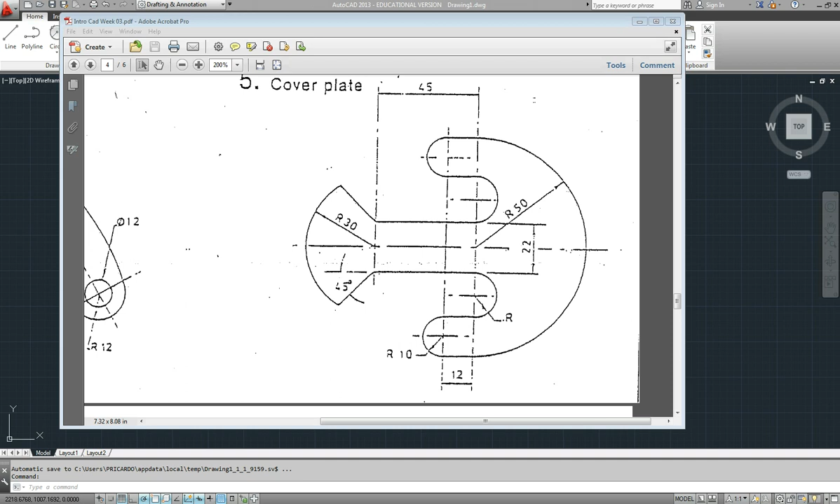This exercise on the cover plate. Let's just draw this. So the way we'll go about it is we'll draw in a centre line to join the two centres of these arcs, and then we'll start working on the circles from there. So first of all, our centre line, and that is 45 long, gives us the size of our drawing.

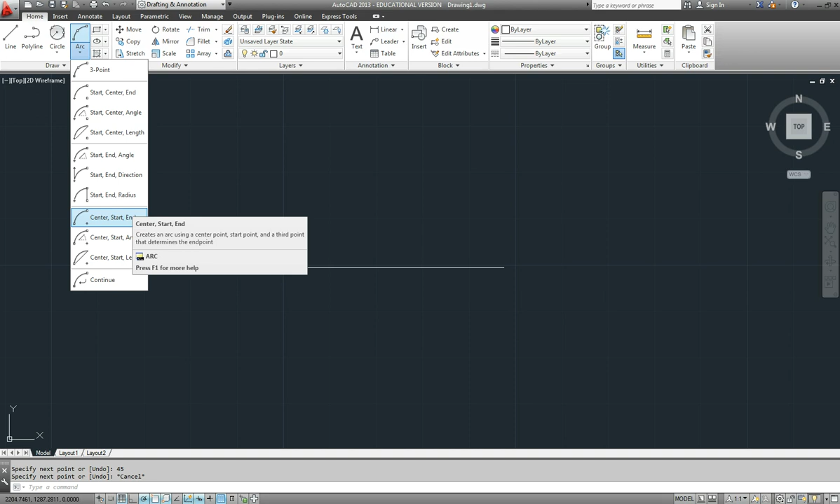Now we can draw the major arc in straight away. It's a radius 50, so let's use arc, and we know the centre point, we know the start point is directly above or below, and we know the angle is 180 degrees. So here's our start point.

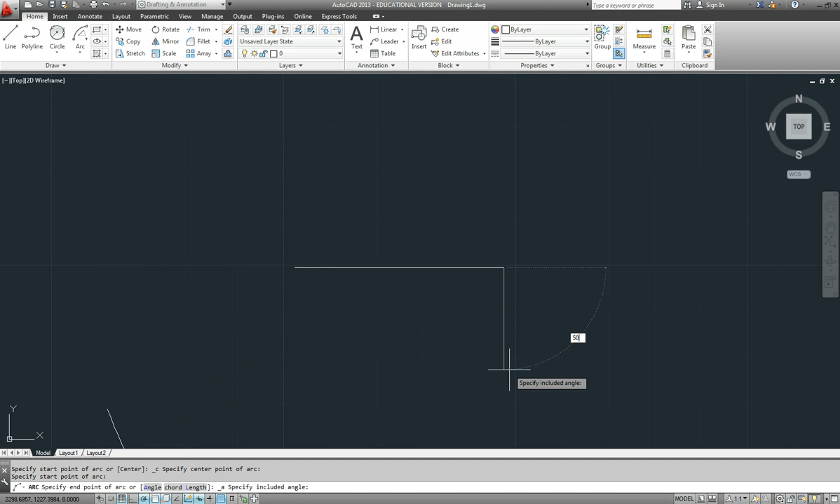Now for some reason it's not giving me a tracer line with the polar tracking. It should be at 30 degrees. Something funny going on there. Now it's doing it for some reason. Okay, so we want to go 50 down. It's our start point. Let's undo that. We'll do this again.

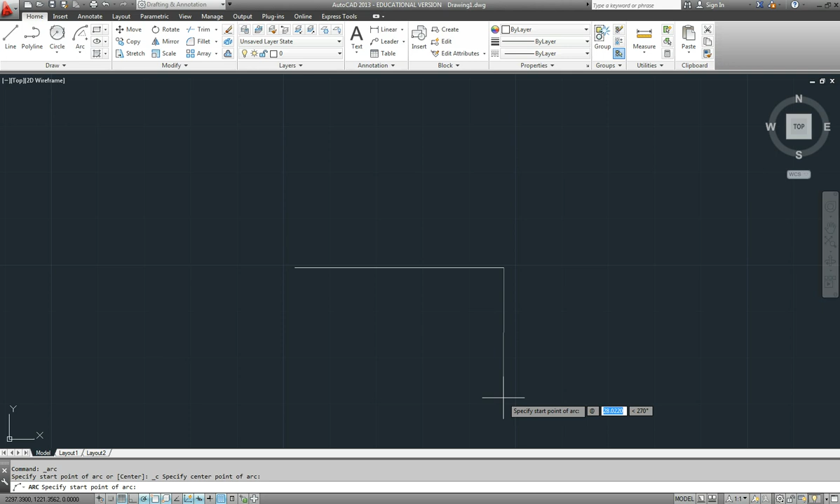So back to arc, and I'm going centre, start, angle. So there's my centre point. For some reason it's not giving me a start point straight down from there, so I'll use the relative command. So we'll go relative to that point. Let's say in the x direction will be 0, and in the y direction will be minus 50. Right, there's more than one way to do it. And the angle through which we're going, zoom down a bit, is 180 degrees. So there's our major arc.

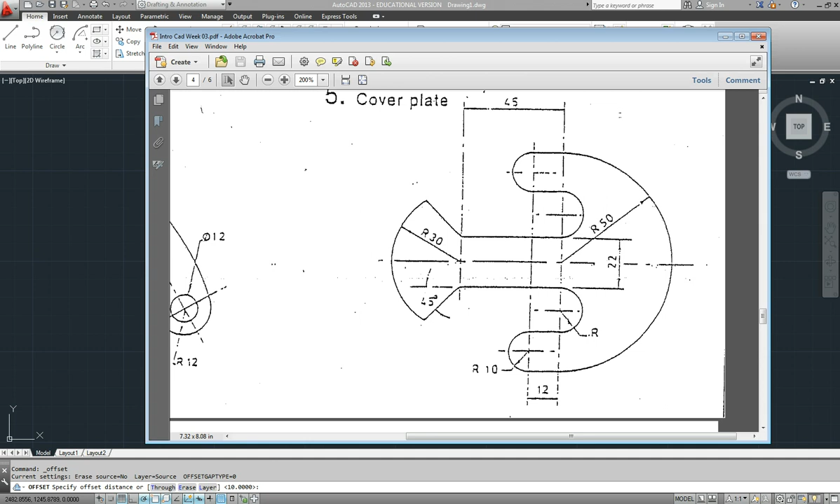Now let's offset this line. Offset, I'll just have a look at the drawing again. So 22 apart, so we're going to offset our centre line up 11 and down 11. Then we can draw in these lines up here, draw in our arcs and start working our way round. Notice with this one we don't know that radius. We have to work that out. So let's do the offset first, and it's 11, and we're going to offset that centre line up 11 and down 11.

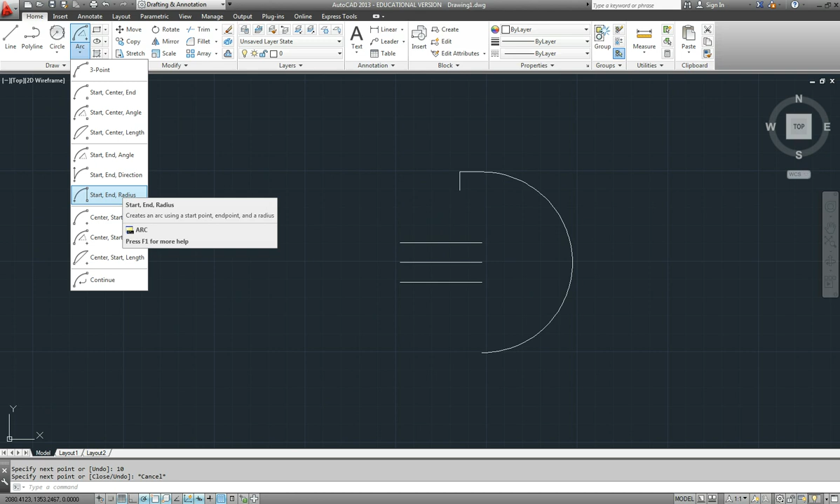Now let's draw these lines at the top. So we've got a line coming straight out, and the distance was 12. I'm just going to draw a construction line down here. We know it's a radius of 10, so that'll give me the centre of that arc. Once again, arc, so I know the centre, the start and the angle. Centre, start and angle. Always draw in an anti-clockwise direction. So I can type in 180, and that gives me that arc.

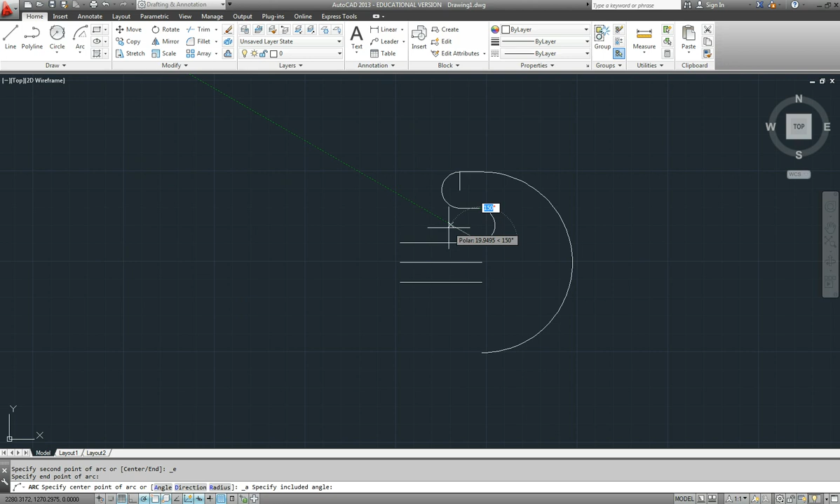Now we can draw a line back 12 mil, and we need an arc in here. We know the start point, we know the end point, and we know the angle. Start, end, and the angle is 180. So that's pretty much finished that part.

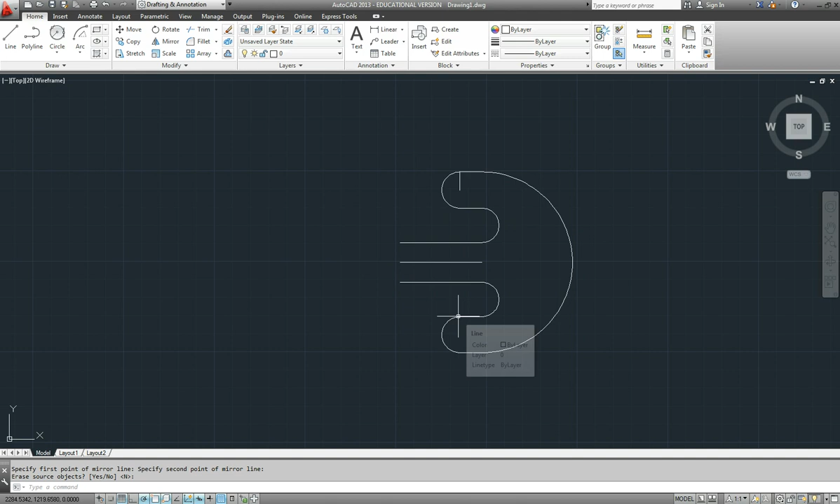We can use a mirror command. I want to take all these pieces, enter, and mirror about that line there. So that's the majority of it done. Just this back section to do now. Several ways we can do it. We can put a circle in and trim it back, run some 45-degree lines up, and the intersection point is where we trim to.

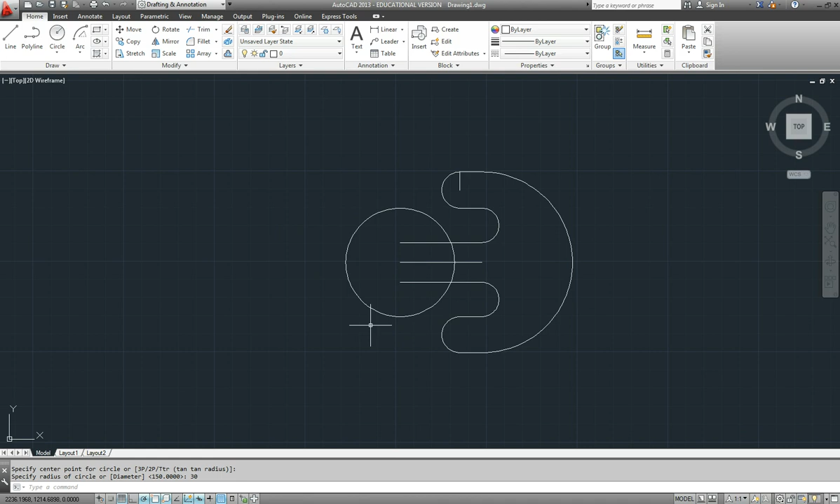So let's do our circle first. It's in the middle of something else there. Circle, centre radius. So the radius is 30, and what we need to do is run a line up from that point at 45 degrees. Now if I go down to polar tracking, right click, I can set polar tracking to a 45-degree increment, and I'll get a tracer at 45.

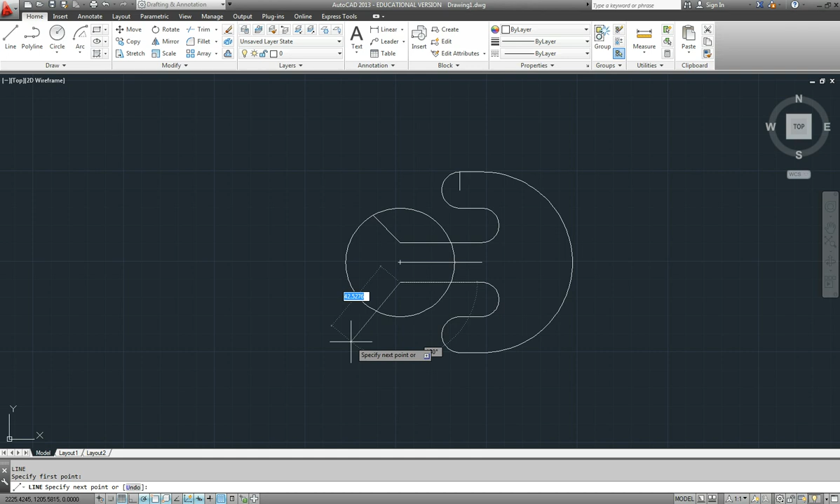I can actually find the intersection there. Same down the bottom. There's 45-degree angle, come back and get the intersection point. And now once again it's all over bar the trimming. Trim, select everything, trim back my circle, and then delete the bits we don't want, and we're done.